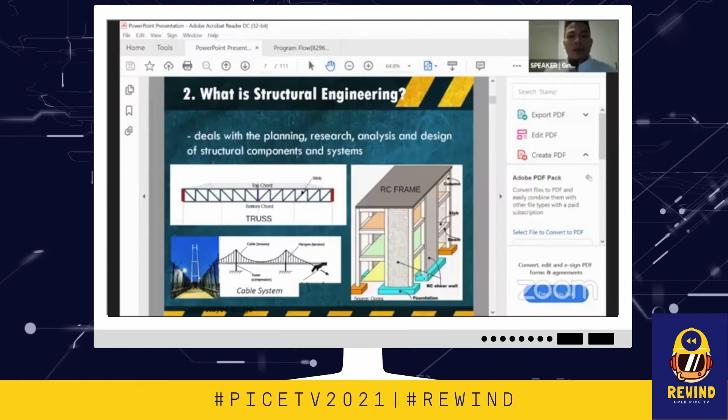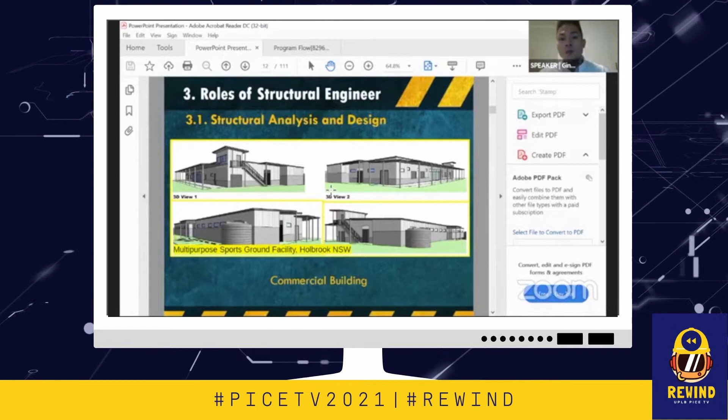We also design, let's say, a commercial building like this. It's a multi-purpose sports ground facility. As you can see here, the projects or buildings I'm showing you are mostly constructed here in Australia because this is where I work. So the pictures you'll see here are basically the projects that I have done here in Australia. Okay?

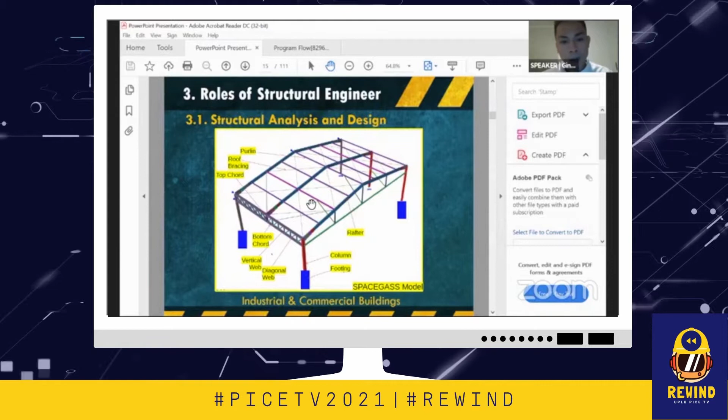We also design structural and residential houses here in Australia. In our country, for example in the Philippines, we mostly use reinforced concrete to construct a building. Here in Australia, the use of timber framing systems is more common, just as you can see in the figure. Basically, their system is timber framing and they use veneer bricks as cladding. So this is an example of a house that was done.

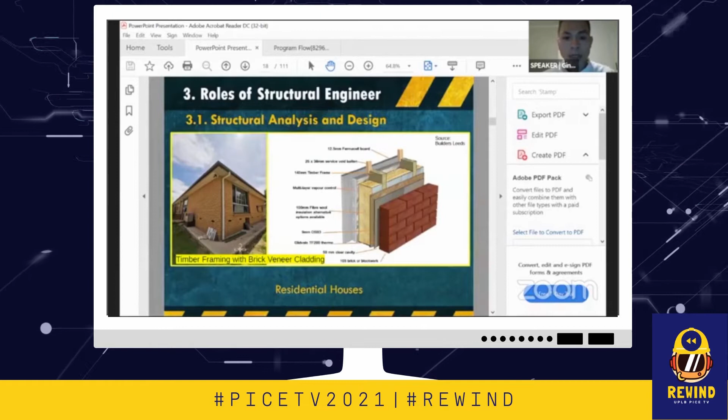And on top of that, actually this house is sitting on top of slab. So dito sa Australia, there are different types of slabs that is usually adapted sa construction. We have a raft slab and a waffle slab. So the main difference between the raft slab and waffle slab is that kung makikita niyo yung waffle slab, it is sitting on top of the ground.

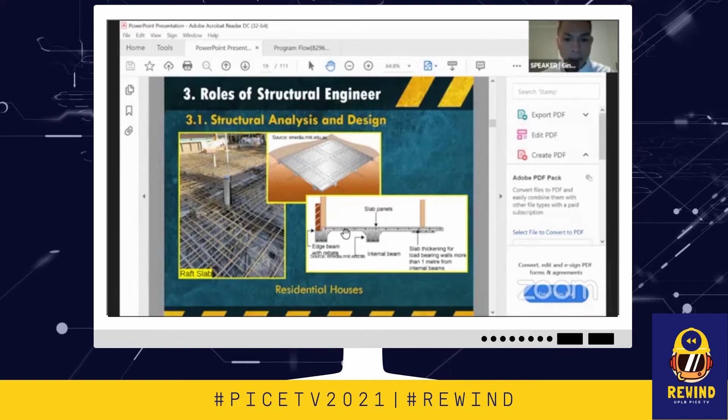And as you can see here, to form those voids, they use this polystyrene or styrofoam. Unlike dito sa raft slab naman, they do excavation and then after that, they lay the reinforcement. Okay?

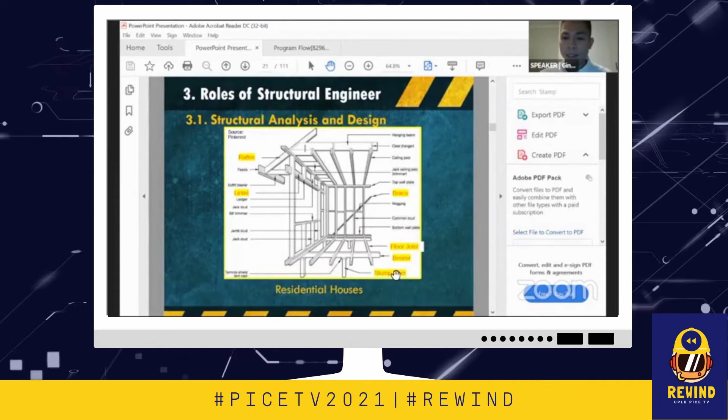So sa houses, usually we design the rafters, the lintels, the wall bracing, the floor joists, the bearers, stumps, and of course the pier footing support. So we also design bridges here. So basically, yung bridge na na-design ko uses this system, steel beam concrete deck bridge.

So we have this concrete deck. So I designed this as usually a one-way slab concrete. And then after that, i-design ko din yung kanyang mga supporting beams, structural steel beams. So usually ito ay made up of universal beams like this one, okay? And then we also design the crosshead and then the column support.

So how do I usually design a bridge? So usually ang gagawin ko is padadaanan ko siya ng ganitong type of truck. We call it SM1600. So I have prepared here, I'm not sure if you can see the video. How do I share the video?

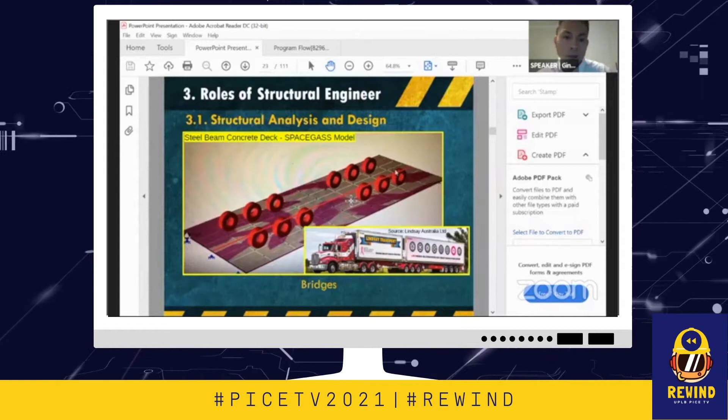Anyway, so kung makita niyo dito, ito yung mga gulong ng truck. So padadaanan ko yung concrete deck ng ganitong type of truck. And then saka ko i-determine yung maximum shear forces, maximum bending moment. Okay? And then from there, i-design ko na yung reinforced concrete deck and then yung structural steel beam.

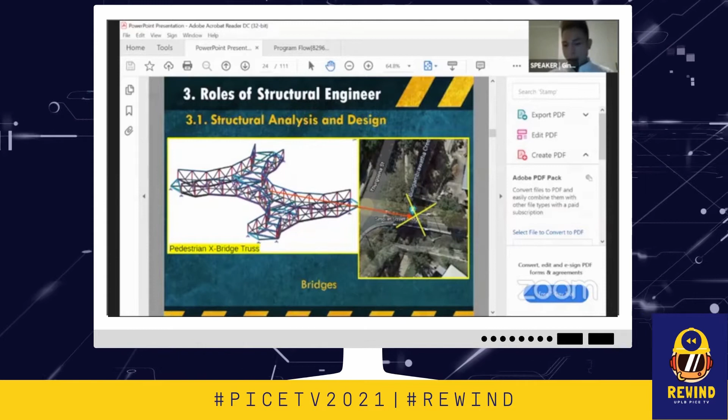So dito sa Australia, or in Albury, I was also asked to design a pedestrian cross bridge which will be constructed under this existing road bridge. Kasi ayaw nila yung tao dumadaan dito sa gilid ng bridge. So ang gusto nila is mag-construct ng cross bridge which is made up of trusses. Okay? So it's a bit challenging pero interesting for me.

So another structure that I designed are footbridges. Also, I designed reinforced concrete tanks, solar shade structures. So I designed the rafters, the columns, and the footing. So usually this is very critical in terms of wind load.

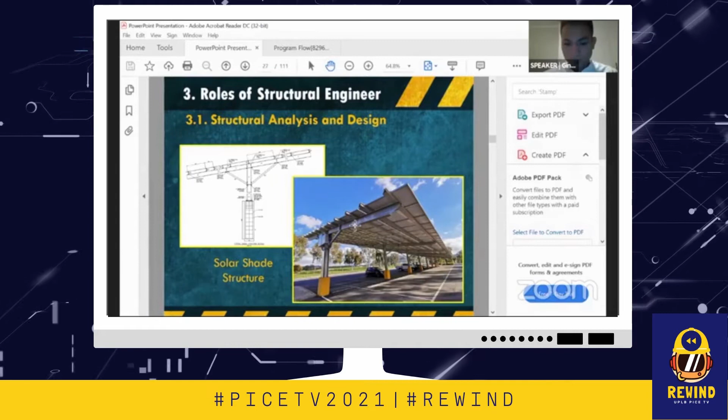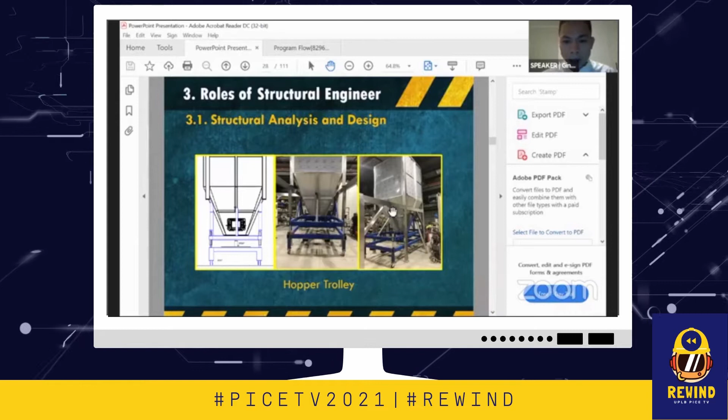And then hopper trolley support. So this is the hopper. And then I was asked to design this trolley support such that kapag pinagalaw siya, hindi siya matutumba. So I also designed public amenities and restrooms. Okay? And then mga foundation or footing support for signages.

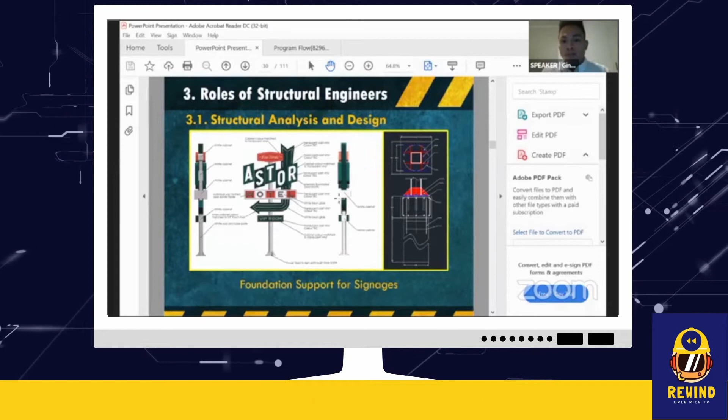So kung ma-realize nyo, ang dami ko pa actually iba't ibang types of structure or projects na ginagawa. So sobrang varied yung ginagawa ko. So yun yung sa company namin, it's a small company, pero kaming mga structural engineer exposed into different types of projects. Unlike if you work in a big company, nag-specialize ka lang sa isang area.

Let's say, magdi-design ka lang ng high-rise building or ng bridge lang. Pero, malaki yung project na yon. Kami naman, mga maliliit na project, pero iba't iba naman yung ginagawa namin. Okay? So, aside from doing structural analysis and design, I also do structural integrity assessment.

So, one good example that I can share to you is this, analysis nitong second floor nitong isang building, itong World Gym, which is located in Albury. Kung makikita nyo, ito yung flooring ng second floor. Medyo hindi nila talaga ginagamit. So, ang plan nila is to expand their gym by using this floor. Okay? So, basically, gusto nilang malaman anong weight ang kayang i-carry ng floor na ito.

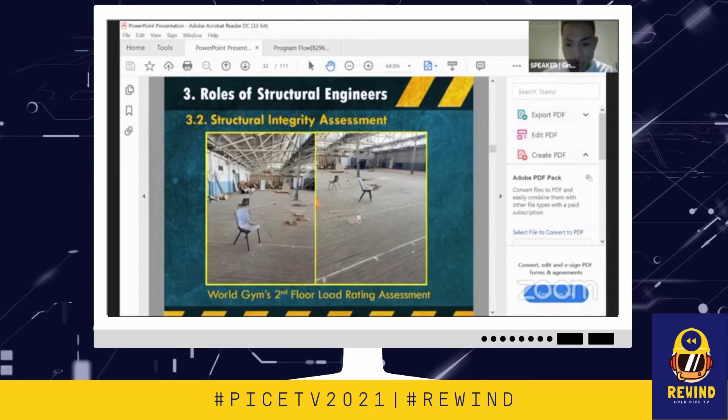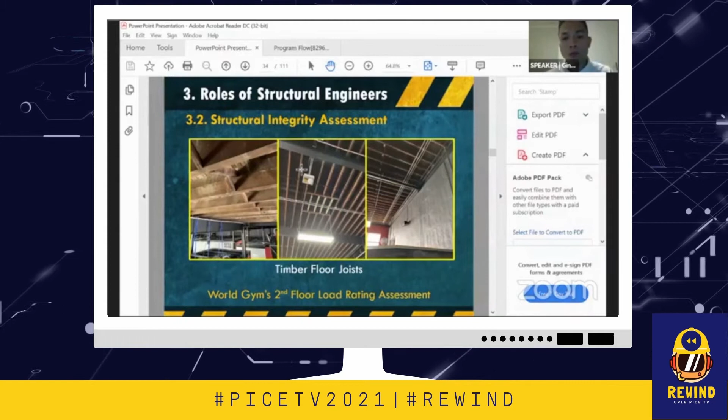So, to do that, ang gagawin ko usually is to determine kung ano yung type of wood itong timber deck na to, ano yung kanyang dimension. Aside from that, I will also determine ano naman yung floor joists na nagsusupport sa timber deck na yon. So, I need to determine kung ano yung kanyang spacing, ano yung haba nitong mga timber joist, and kung anong type of wood ba siya, kung hardwood, softwood, or laminated veneer lumber.

So, after determining that, syempre, i-determine ko naman next is yung mga bearers. So, here, they use steel floor bearers. So here, gumamit sila ng sobrang lumang structure. I think itong building na to was built in 1930. So kung makita nyo, itong section na to, based sa inyong experience, I guess sa AS, merong specific table for specific section. Ito, wala akong makitang span tables or table na makita ko yung properties ko.

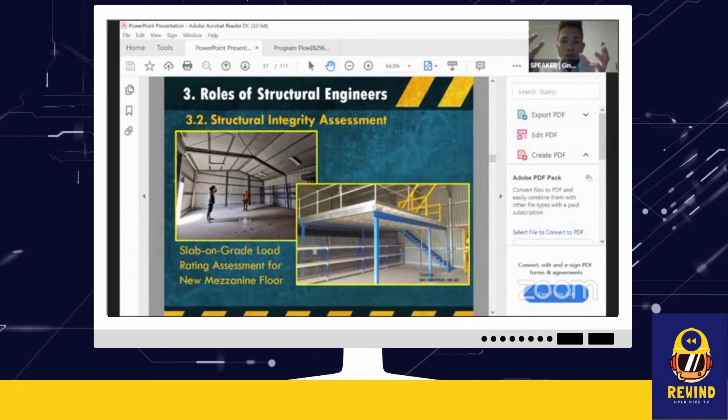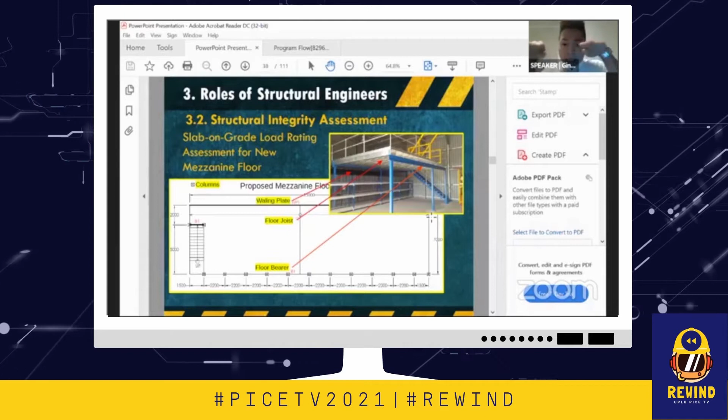So usually here, actually here, I designed their floor joists, which usually use a C-section. Okay? And then the bearer, I used a PFC, parallel flange channel, and square hollow sections, which have a base plate at the bottom to distribute the force to the slab. Okay?

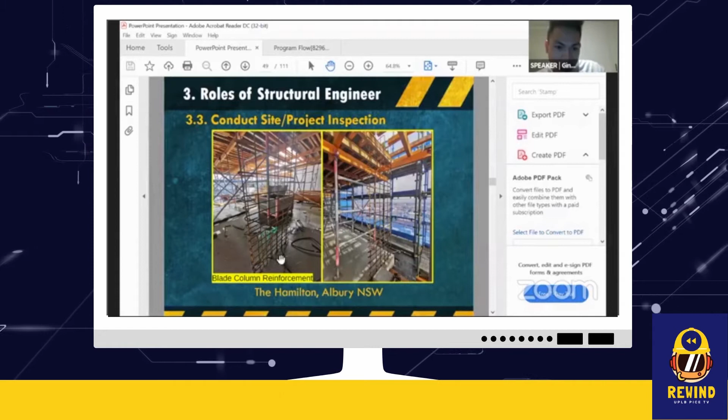So, ito naman, yung slab niya actually is made up of pre-stressed concrete slab. So, I also check the reinforcement of that, including yung blade column reinforcement. Okay? Aside from that, we also check itong shoring and itong mga formworks and temporary shoring.

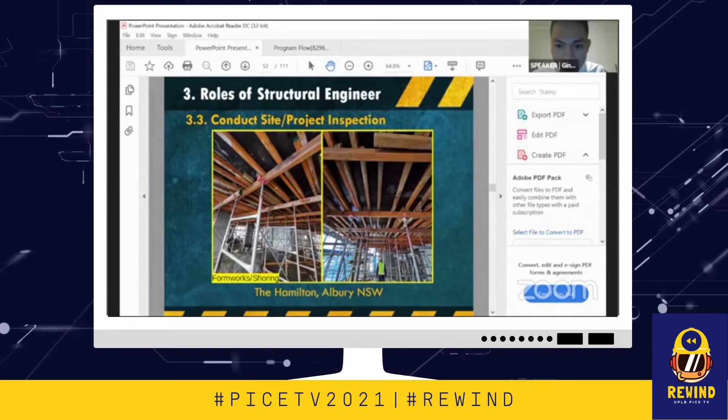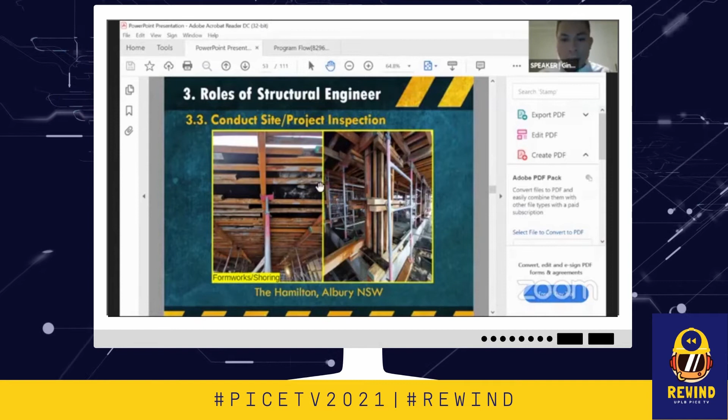So, makikita nyo dito, itong portion na to, ipinapa-adjust namin yan, kasi ayaw natin ng eccentric loading. So, gusto natin, kagaya nito, na yung mga support is nasa gitna. So, one good example, tulad nito, itong timber na to, kailangan i-adjust natin such that it will be aligned to this shoring. Okay? So, minomonitor din namin yan, pati spacing ng mga temporary shoring na to.

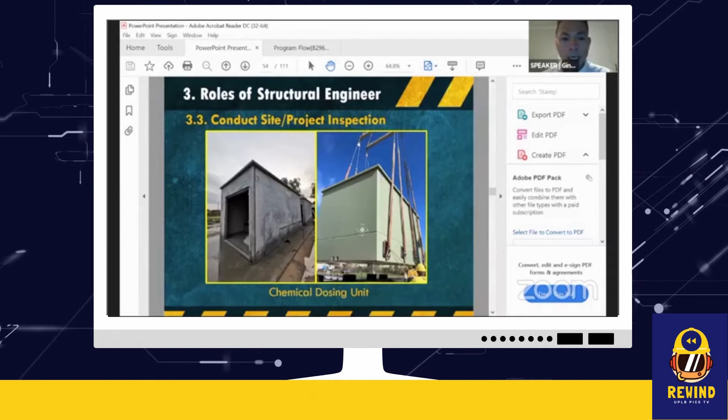So, another project na ginagawa namin or ini-inspect is this chemical dosing tank. Usually, ito ay ginagamit to store water and other chemicals. So basically, itong chemical dosing tank na to, it is made up of different concrete panels. Makikita mo dito, nakalay na yung mga reinforcement and then may opening. Yan basically yung nagiging, halimbawa, door. Okay? So ito yung sa walls, let's say ito yung sa other side of wall, ito yung entrance ng pinto. So pag binuo mo yan na parang Lego, magkakaroon ka ng chemical dosing tank.

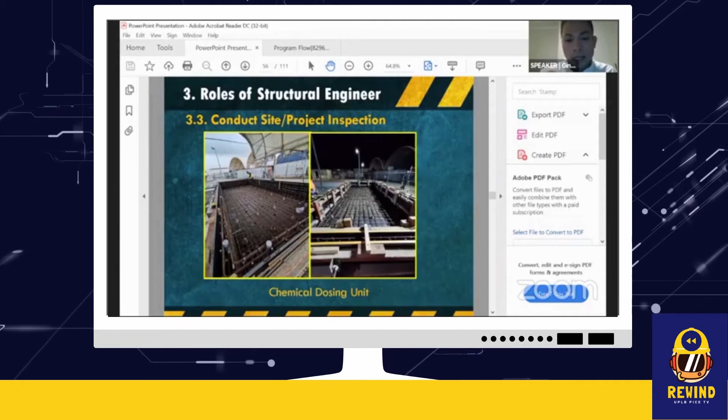So usually, ang gusto ng owner is for us again to check if the design is being followed. So minomonitor namin yung concrete placement nila, kung binabibrate ba, kung properly laid yung mga reinforcement, and then yung leveling procedure nila, and then yung pagbabibrate ng concrete. So we also monitor yung mechanical properties ng concrete. We want to make sure na meron siyang adequate slump. As reported here, kailangan 120.

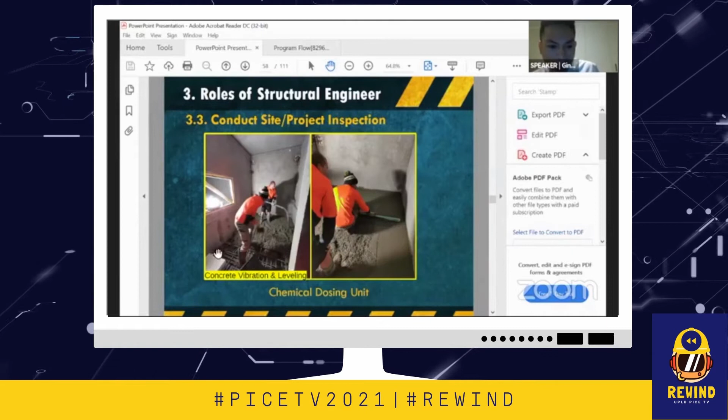Last time nung nagkaroon kami ng site inspection, ang slump lang is around 50. So hindi namin pinayagan, okay? Kasi this is a chemical dosing tank. So kailangan talaga yung mga concrete is makakapasok sa mga singit-singit. Again, yung slump, it defines the workability ng concrete. Ngayon, pag mababa yung slump, ibig sabihin hindi flowable, masyadong viscous yung concrete. Hindi siya papasok sa mga singit-singit or mga corner. So kailangan mataas yung workability niya.

So pinaulit namin, okay? And then we also monitor the temperature, and also syempre at the end of the day kailangan namin malaman yung concrete strength na ginamit nila. Okay?

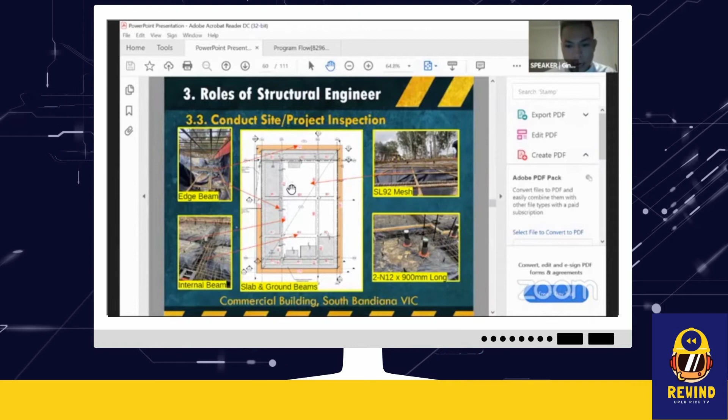Ito another typical project na ginagawa namin to inspect again the reinforcement. Ito ay slab on ground. Actually, this is a raft slab, okay? Na we also monitor yung kanyang reinforcement. And for example, here we want to make sure na itong mga services, meron kang mga bakal na naka-support doon sa opening. Itong mga diagonal bars dito. Okay? Kasi parang kinat mo yung bakal dyan, so to compensate yung mga bakal na nawala, you provide these additional bars.

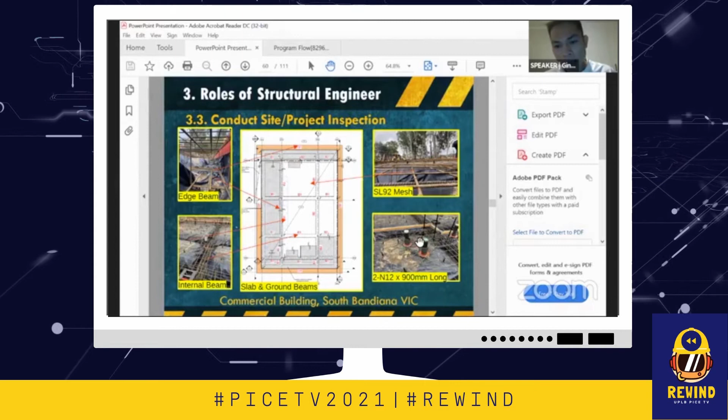So we also check, another project, commercial building sa South Bandiana. So tulad nito, dito sa isang malaking slab on ground, usually kailangan meron kang saw-cut joint. Kung makita mo yung mga bakal dito, may putol yan, may putol doon, may putol dito. So, para saan ang saw-cut joint? Usually, para yan to prevent yung mga cracks sa concrete kapag nagkakaroon ng shrinkage. Usually ang concrete, pag nag-cure siya, through time, nag-evaporate yung water, so mag-shrink siya. So nagkakaroon tayo ng cut para mabawasan yung stress, kumbaga meron na siyang automatic na cut. So yung cracking within the solid section, ma-prevent natin.

The other one is we also check kung tama ba yung dowel joint location. So, anong purpose usually ng dowel joint? Actually, that is to be able to transfer yung vertical loads dito sa isang slab na to to the other slab. And we want to make sure na hindi magkakaroon ng differential settlement between the two slabs. Okay? So, yan yung purpose ng dowel.

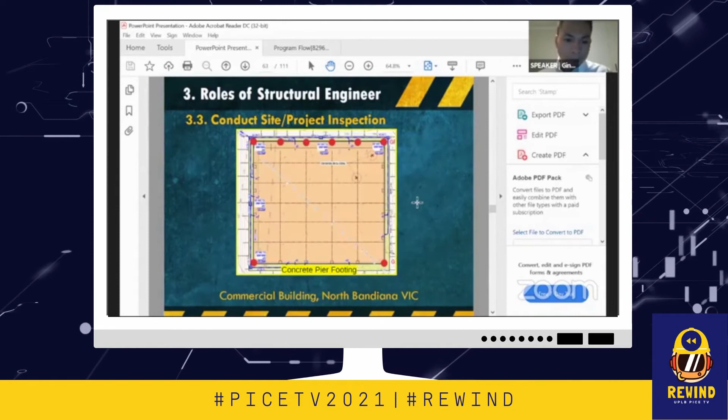So, we also check mga footing, kung ilang bakal, usually yung hukay. So, ang goal natin, 900 by 1,300 deep na footing. So, kailangan meron 10 bakal, 10 N20, and then meron yung ligatures mo, or yung ties, na yung diameter is 12, then 500 yung spacing. Okay? So, we also monitor that one.

And then the other interesting na ginagawa ng structural engineer ay to provide structural solutions. So ano to yung mga, I'll give you some examples, very interesting projects na nagawa ko na sobrang challenging, but again, as I have said, very interesting kasi I'm really into structural engineering.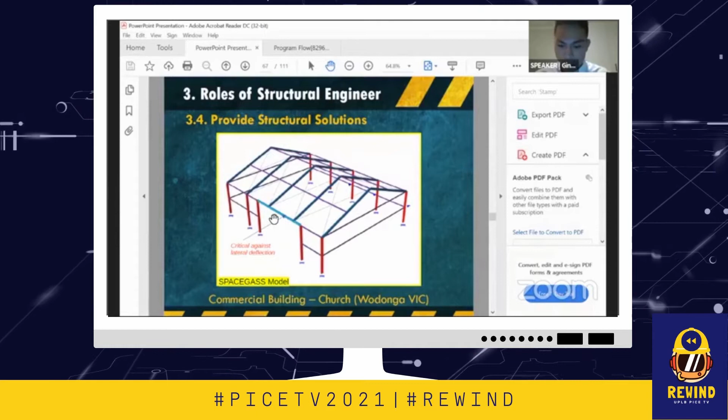Ang naging solution ko is to use this combination of steel sections wherein I have this universal beam, ito yung universal beam, UB, sitting on top of this parallel flange section. So usually, itong parallel flange section, siya magre-resist ng lateral deflection, while itong 250 UB26, siya naman ang magre-resist ng vertical loads, okay, or vertical loading.

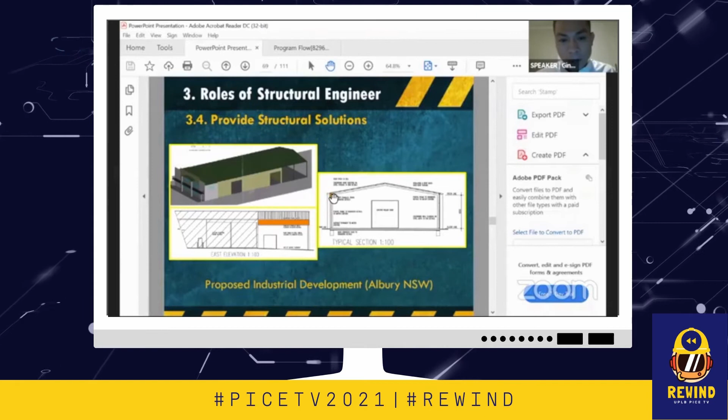So, pag kinat mo dito sa section na to, ito yung makikita mo yung view. So magkakaroon ka ng column dito, rafters dyan, truss dito. Another problem dyan, itong truss na to na 1 meter deep is yung lateral deflection. Okay? So, ito yung kanyang naging free body diagram. Again, you have the column, the rafters, and then the truss. Ang challenging na part dyan is yung lateral deflection.

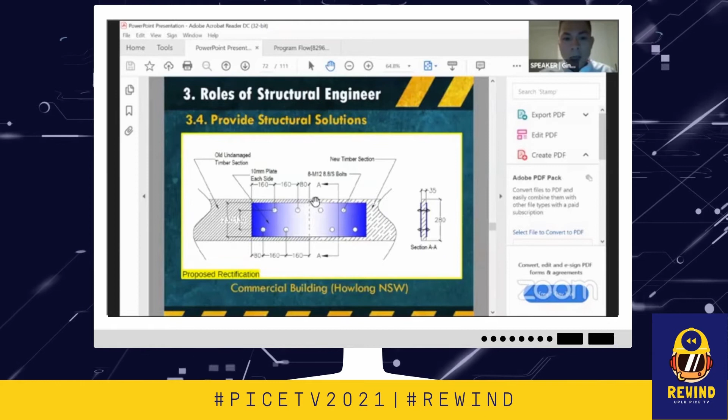So, nag-propose ako na, okay, sige, magagamit pa rin natin siya, pero ang gagawin natin, we will remove yung mga damaged portion and replace it with a new timber. And then, syempre, kung meron tayong bagong ididikit, kailangan natin ng connection details. So, ngayon, nag-propose ako ng gantong connection na, ito, halimbawa, ito yung old undamaged timber section, yung portion na yan, and then you have this new timber section, connected siya with two plates, okay? And then we will connect them using 8 M12 bolts.

So, yung analysis na yan, if interested kayo, pwede ko siyang i-share sa inyo later on. So, ito yung proposed rectification ko. Actually, ito yung new timber, and then makita mo, nasa sandwich siya ng 2 plates using 8 bolts. Okay?

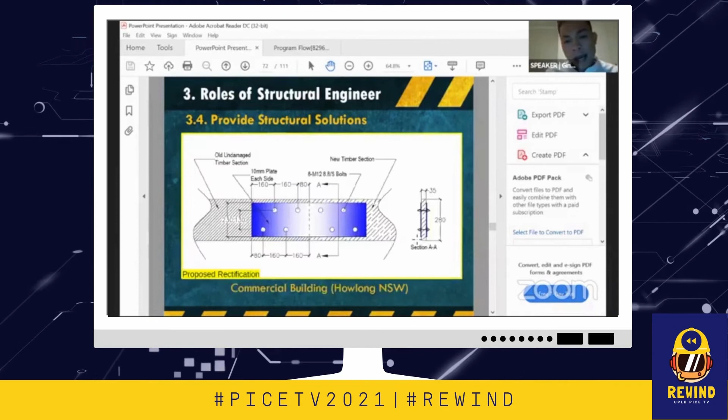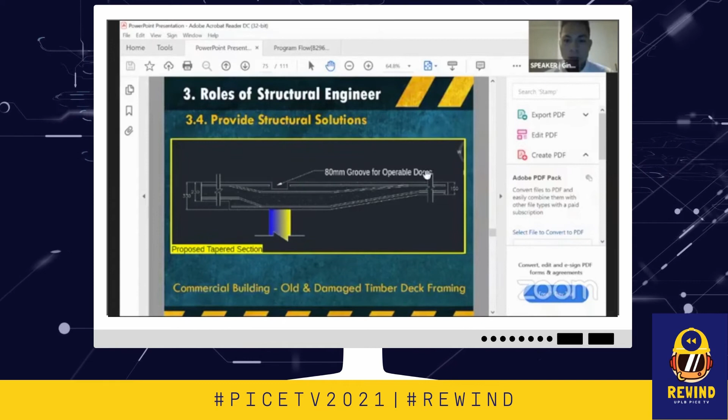So, nag-isip ako, ang naisip kong proposal is to utilize a tapered section. So, again, nakita mo dito, yung required na 230 na-achieve pa rin natin, pero pagdating mo sa end, nire-reduce mo na yung cross-section para mabawasan yung self-weight ng slab. Okay? So, first time ko itong na-encounter kasi usually tayo sa school, pag nag-design, okay, isang cross-section lang. Pero dito, magagamit mo talaga yung creativity mo as a structural engineer.

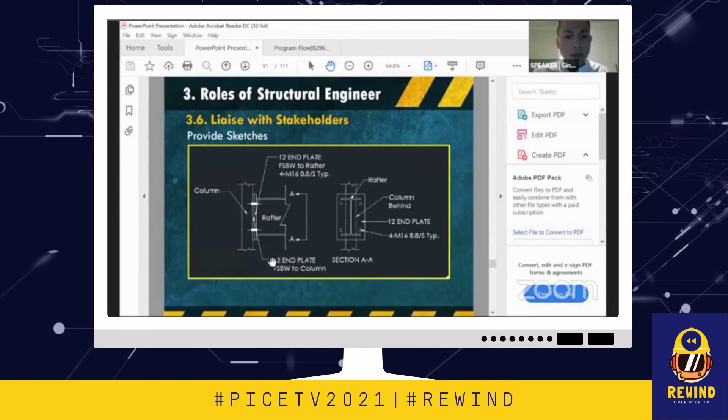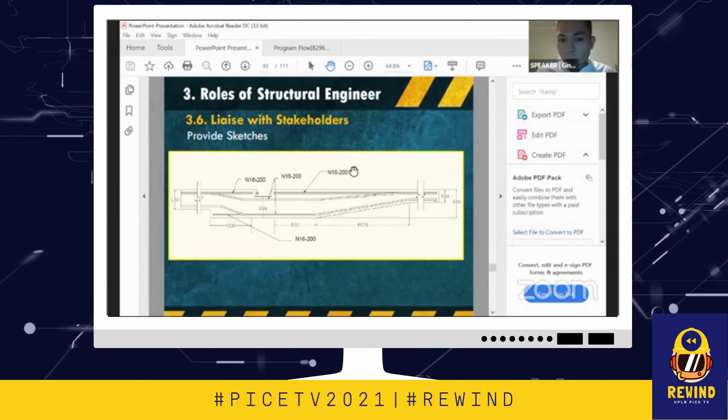And then tulad nito, halimbawa, napaka-critical nitong layout nitong rebar. So ako yung nag-suggest na ganito dapat ang layout ng mga bakal, okay? Just to make sure na itong slab na to will be able to carry the imposed dead loads and live loads. Okay? So yan yung trabaho ko as a structural engineer. Mainly yung 6 na yon.

Now next is, I also want to share to you yung job ko as a structural researcher. Okay? So basically, I will explain to you my job as structural researcher by explaining to you itong bagong technology na tinatawag ko na glass fiber reinforced polymer reinforced geopolymer concrete. So, ano ito? Actually, para siyang reinforced concrete. Yung konkreto, pinalitan lang natin ng geopolymer. Yung mga steel bar, pinalitan lang natin ng mga glass fiber reinforced polymer. Ito yung mga plastics or polymer reinforced with glass fibers.

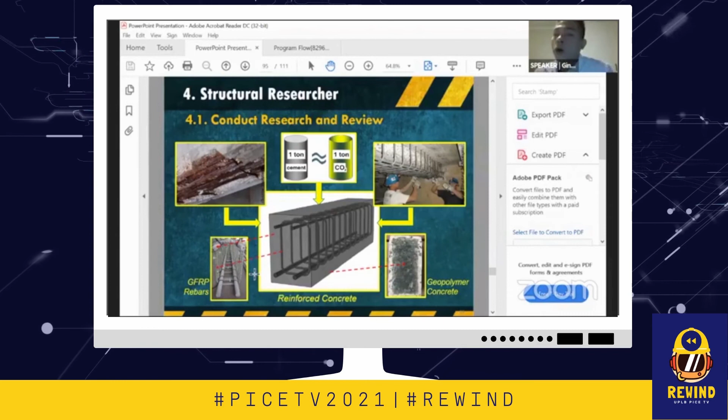Okay? So to address those problems, actually ang ginagamit ngayon is either to use GFRP rebars para ma-address yung corrosion, o kaya to address naman yung sustainability problem ng concrete, gumagamit ng geopolymer. At nag-research ako, based on my research, wala pang nagagawang research about the combined use of these two materials, nitong GFRP at saka ng geopolymer concrete. So ang naging goal ko is to check whether itong geopolymer concrete reinforced with GFRP rebars is possible to be used for construction. Yan yung naging work ko mainly as a structural researcher.

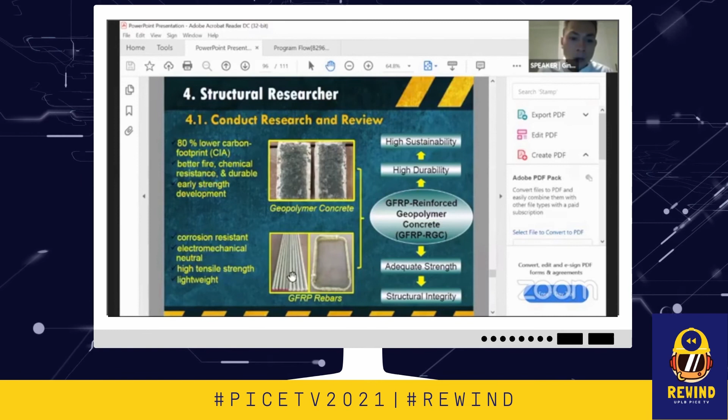So again, nag-research ako about properties ng geopolymer concrete. It has high sustainability and high durability. So basically, itong geopolymer concrete, it is made up of fly ash and slags. Tapos yung pang-binder mo is sodium hydroxide. Okay? So actually, itong fly ash and slags, they are byproduct materials. So, waste materials. And then, ito namang GFRP rebars, they are corrosion resistant. So, usually, they are made up of vinyl ester, reinforced with glass fibers. They have high tensile strength. So, yon. Ito yung typical properties ng GFRP rebars na ginamit ko.

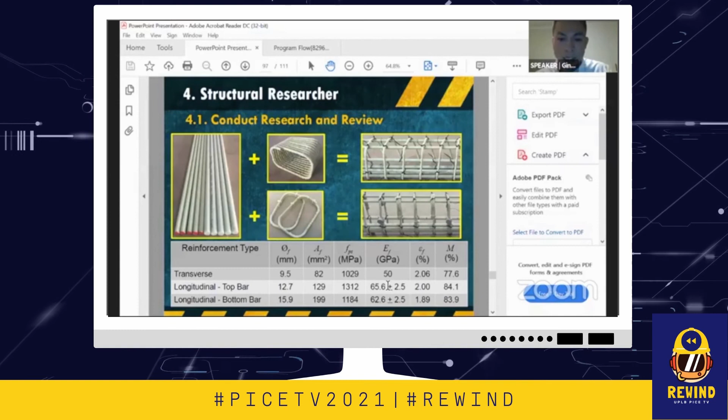Yung tensile strength, kung mapapansin nyo, it's 2 times higher than the yield strength of rebar, which is 500 megapascal. Pero ang disadvantage ng rebar na to is yung kanyang modulus of elasticity. Masyadong mababa. Okay? So 50 or 60 gigapascal versus 200 gigapascal. Meaning, ang challenge dito sa paggamit ng rebar is nagde-deflect siya too much. Meaning, pag nagde-deflect siya, mas magko-cause ng cracking. Yun yung disadvantage. Ito naman geopolymer concrete, yung properties niya is almost similar sa concrete.

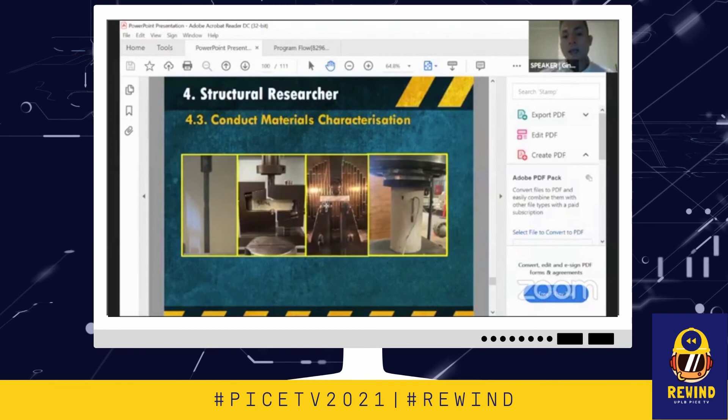And then after that, yung na-fabricate nyo na beam, geopolymer concrete beam with GFRP reinforcement at the bottom, i-test na natin siya. So itong beam na to is 3 meter long. Okay? And then of course, may comparison ako dito. Nag-fabricate din ako ng beam reinforced with steel bar para lang ma-compare ko ano yung difference between the two.

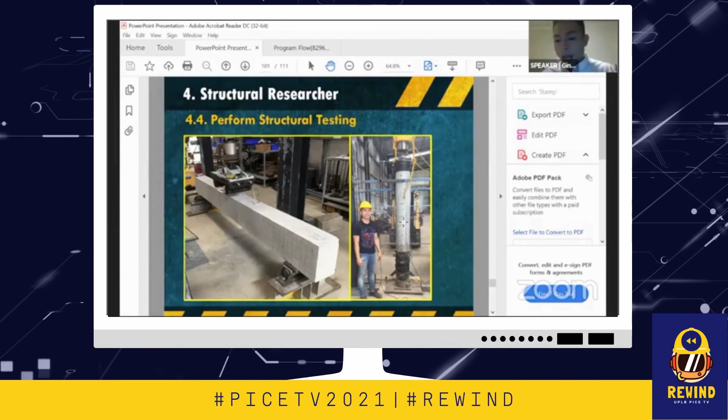And then also tested yung compression capacity nitong geopolymer concrete reinforced with GFRP bars. So after natin mag-conduct ng mga structural testing, ipaprocess natin lahat ng results, okay? And then i-analyze natin siya, and then after that, magpapublish na tayo ng mga technical papers, okay? And then also, aside from publishing technical papers, you also present your projects in different conferences.

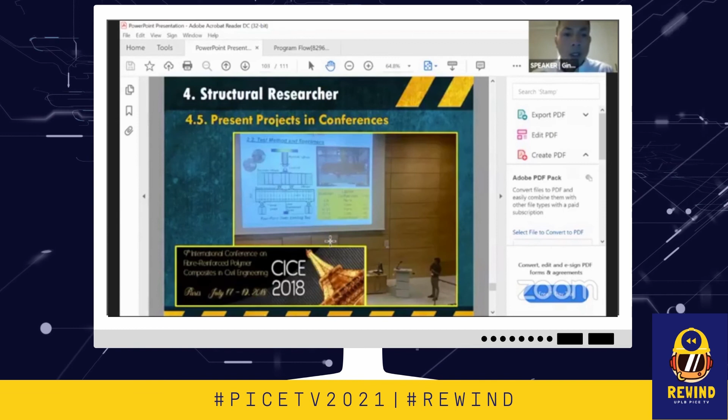So actually, last conference na napuntahan ko is yung CICE sa Pisa, Italy. Okay, so I presented then yung project ko. And then of course, use this opportunity to network, okay? To increase your mga kakilala mo, yung mga contacts mo. So dito, mas maganda, magkakaroon ka ng mas maraming ka-collaborator. Okay? Ka-collaboration. Yep. So yun yung work ng structural researcher.

Okay? And then ito na, sa last part is yung mga tips or advice ko. Yun nga, nabanggit ko na, pag halimbawa nag-graduate na kayo at mag-start na kayo mag-work, usually ito yung point of comparison ko: small company versus a big company. So usually, pag nasa big companies ka, like GHD or iba pang malaking companies, pag structural engineer ka, parang specialize ka lang sa isang bagay. Parang kang nag-PhD. Pero kapag sa small company ka, parang kang undergrad. Expose ka into different projects na small projects lang.

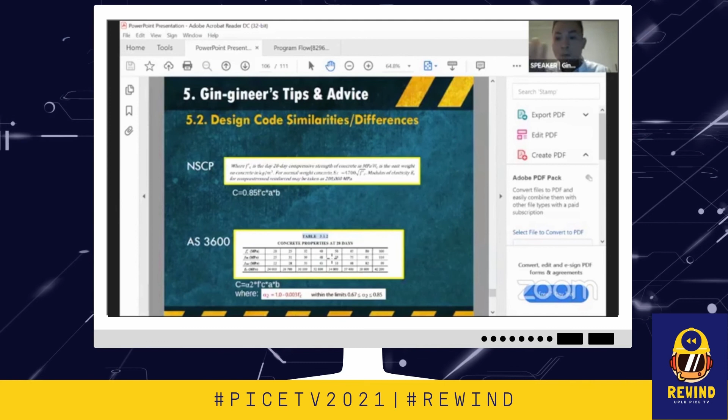Okay? And then yung mga design codes, siyempre nagturo ako dito sa atin sa Pilipinas, nagturo ako sa Australia, and then nagturo ako sa New Zealand. So nakita ko, design philosophy is the same. We use ultimate strength design, working stress design, pero nagbabago-bago lang sa mga parameters. For example, sa National Structural Code, not sure kung ginagamit pa rin yung 0.85 f'c for concrete to calculate the compressive strength of concrete. Pero dito sa Australia, sa Australian standard, we use alpha 2 f'c. Tapos meron ka pang formula ng alpha 2. And then ito yung modulus of elasticity ng concrete for a specific strength. So magkaiba sila, pero again, the procedure is the same. Yung mga formula, yung mga factor of safety lang ang different.

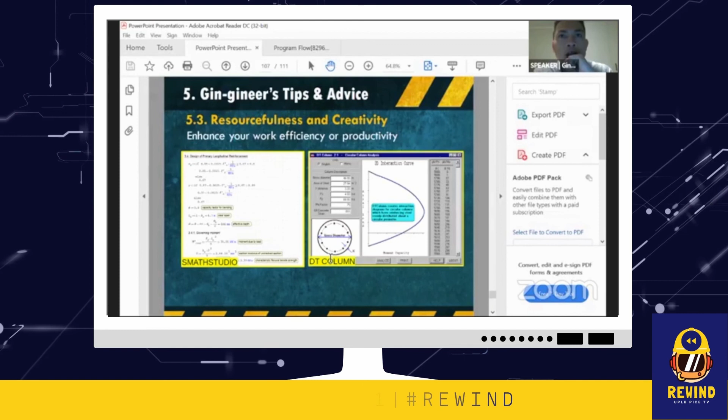And then ako, for example, in my job, required kaming mag-conduct, first 5 months or 6 months, we do hand calculation. Ang very challenging dyan is yung pagsusulat at the same time pagka-calculate. So nag-isip ako, paano ko kaya mapapabilis ang calculation ko? MathCAD is pwede, parang ganito yung format niya. Kaso may bayad siya. So nag-research ako ng mura and then nahanap ko tong SMath Studio na parang spreadsheet, nakasulat yung mga equation mo dyan, pero ang performance niya is parang MathCAD. So yung job na dati kailangan kong tapusin in 1 or 2 days, natatapos ko lang siya in 3 hours, dahil meron akong ready-made na spreadsheet na kino-copy-paste ko na lang.

So, another software na free to calculate, let's say, itong compressive strength ng circular columns. Alam nyo to, yung iba na natapos ng reinforced concrete, masyadong mahaba yung calculation for a circular column, and actually may interaction diagram. Pero dito, meron ng software, okay? So yeah, be resourceful to increase your efficiency or productivity.

So ito pang isa. Na-realize ko, nung nagtuturo ako ng CE 132, ang dami kong formulang equations, ng deflections, bending moment na pinapamemorize. Pero in real life, ibibigay naman talaga siya. So for example, ako, pag may nagpapadesign sa akin, gusto niya very quick. Hindi ko sinasuggest na gamitin, pero I'm just sharing itong ginagawa ko.

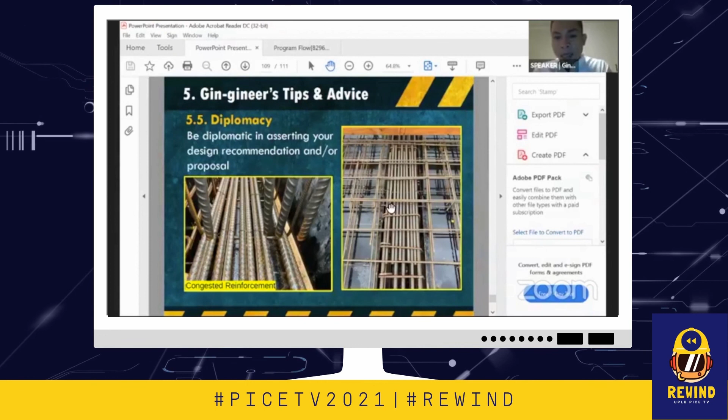Okay? And then, of course, I will advise to improve your skills by studying design codes, design examples, new softwares, and new technology. And I think that's it for me.